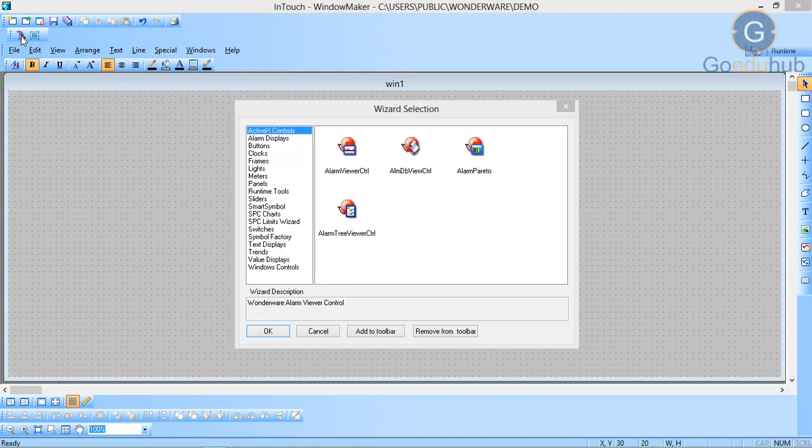Now we will create a vertical percentage fill link for an object. As you know, vertical percent fill links will be controlled by an analog tag. So first, for varying the analog tag value, we require a slider. For taking a slider, go to wizard, go for sliders and select vertical slider.

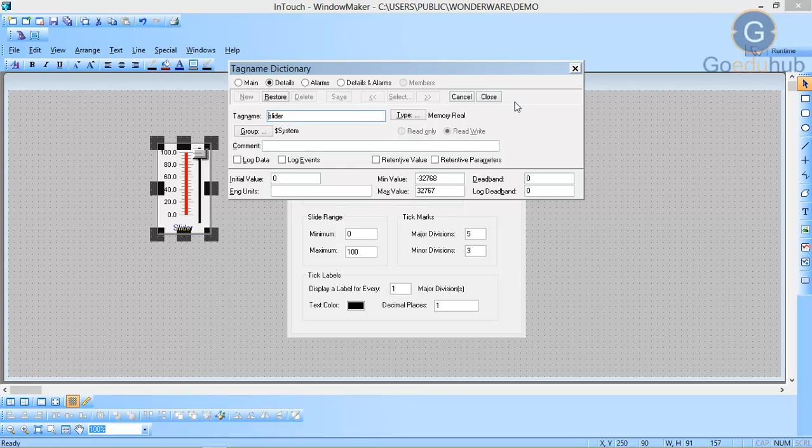Now provide an analog tag name such as slider, define that tag name, and notice that the data type will be memory real or memory integer. Then click on save, close. Now we will take an object and create a percentage fill link for that object.

So I am creating a shape by using a rectangle. Now I want that when I vary my slider between 0 to 100, my tank or that object you are using, the level of that object will also vary. For that, what you have to do is just double click on that particular object.

Now you can see here the percentage fill property. Here I am going to change level in the vertical direction, so I will go for vertical. Note down that point, the horizontal and vertical percent fill links are created the same way. Here I am going to describe the vertical percentage fill link.

Now in the percent fill section, click vertical, then the vertical fill analog value dialog box will appear. In the expression box, type an analog tag name or an expression that equates to an analog value. So here I am providing the slider tag name because I am using the same tag name with this slider.

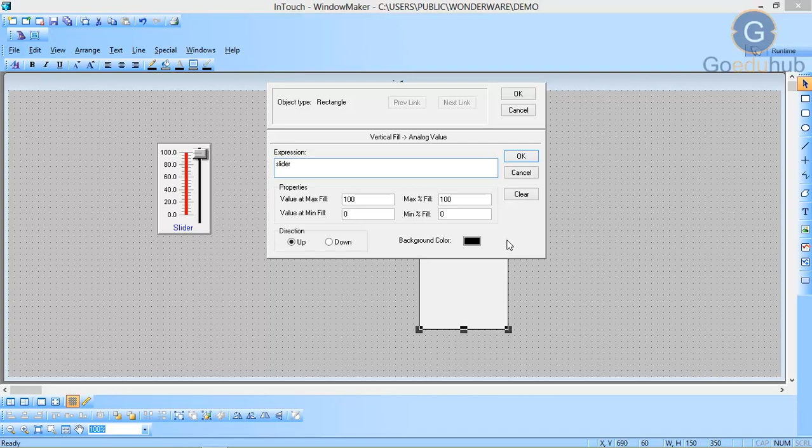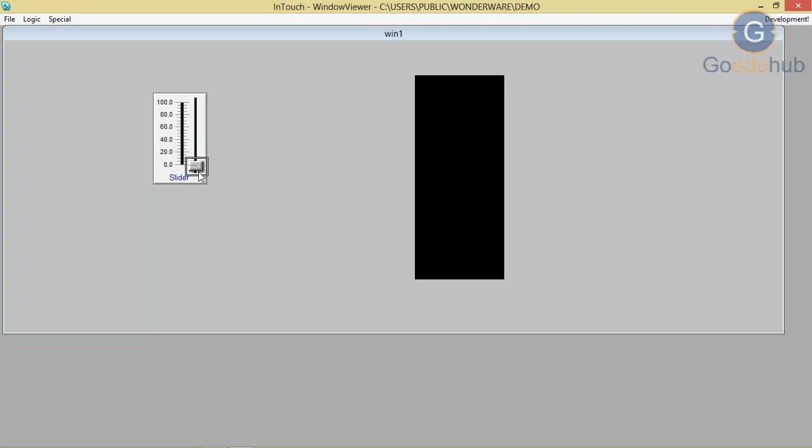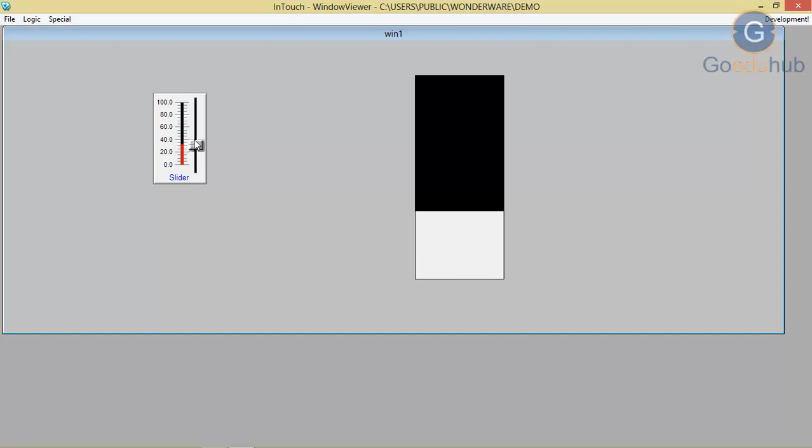Now go for runtime. As you can see, the foreground color is at 0% because my slider value is also 0. As I move my slider value, or as I increase my slider value, you can see the foreground color level also increases. As my slider reaches the middle point, and as my slider reaches the maximum point, you can see the level of the object is also 100%.

So likewise, you can use the horizontal filling property also.

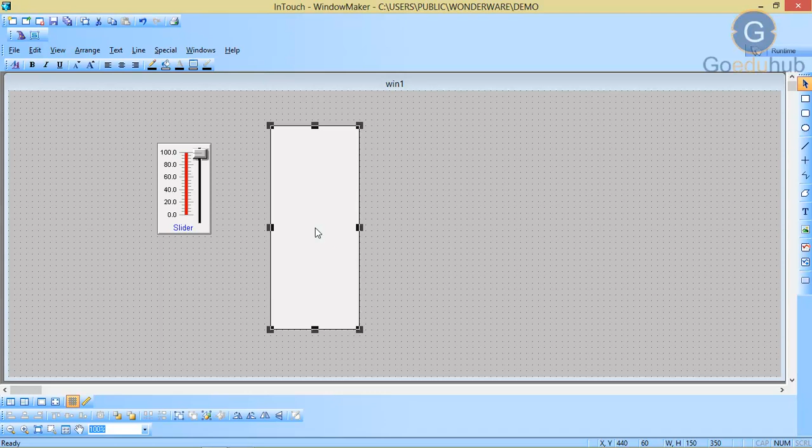Now, if we have to use animation property for a symbol from Symbol Factory, for that, go to Wizards, go to Symbol Factory, double click on that and single click. In Symbol Factory, if you go for tanks, you can use that for showing a tank.

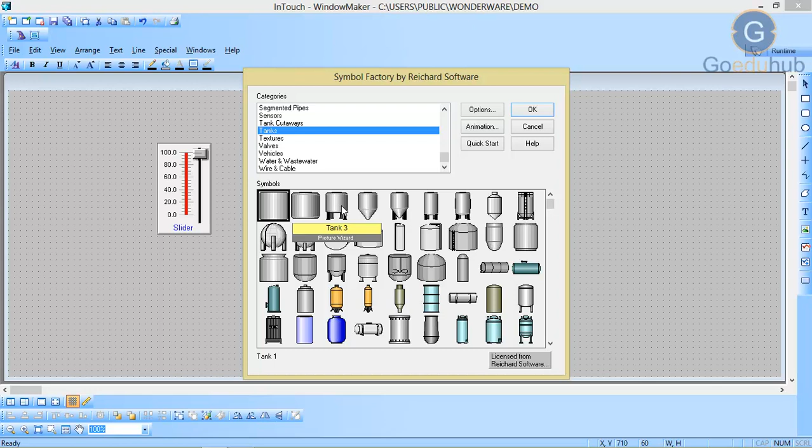Just double click on any symbol. From here you can enlarge it. Now if you again double click on that symbol, it will take you back to Symbol Factory.

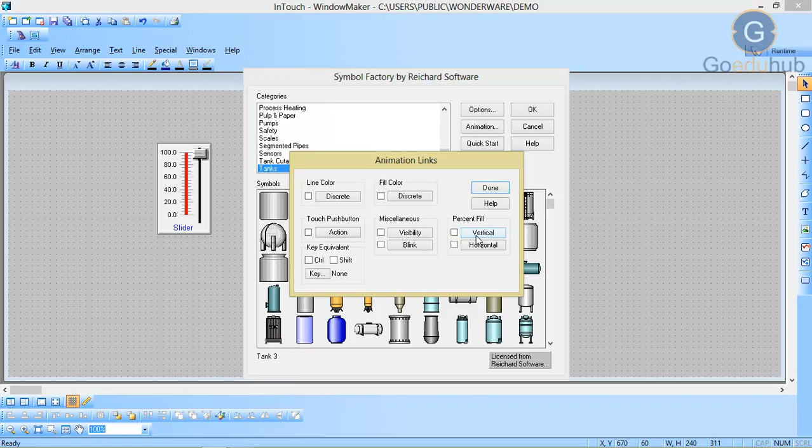Here you can go for animation, and here if you go for fill property, here if you go for percentage fill, go for vertical. And the same thing we have to do as we have done with the basic rectangle object. Just provide your tag name.

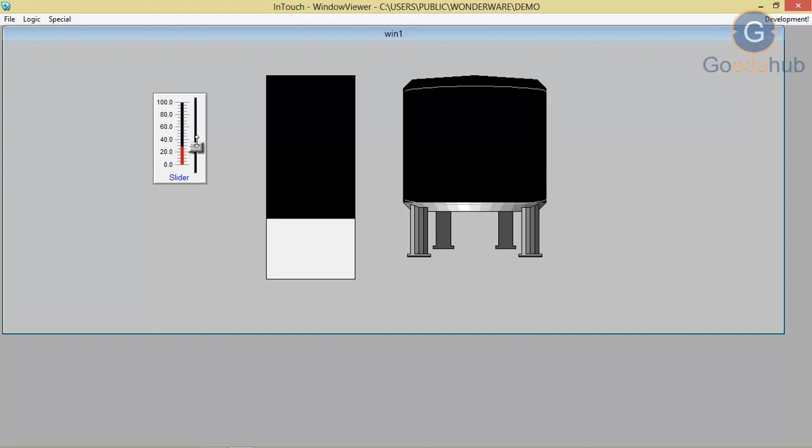If you see again here, when I am increasing my slider value from 0 to 100, the foreground color for the rectangle object and tank is also increasing. But as you can see, the foreground color for the tank is increasing from the pillars. Again you can see. So here you can see that the foreground color for tanks, meaning the change of level for tanks, is increasing from the pillars, from the base.

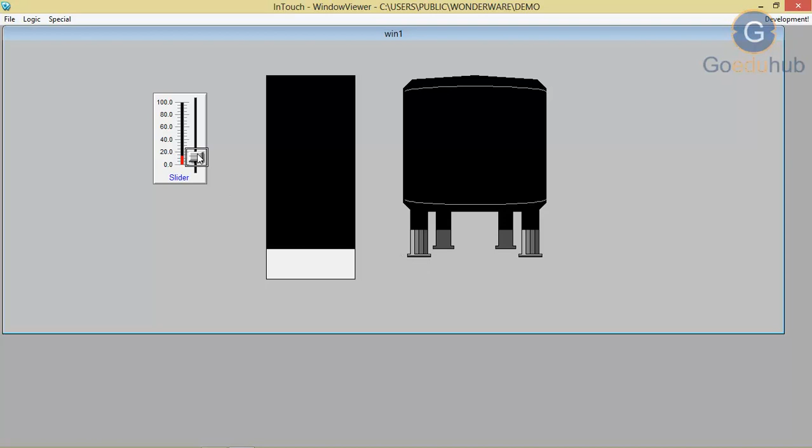So for removing this error, we can use break cell and break symbol. Now we will learn how to use break cell and break symbol. As we saw, the level of the tank is changing from the base or from the pillars.

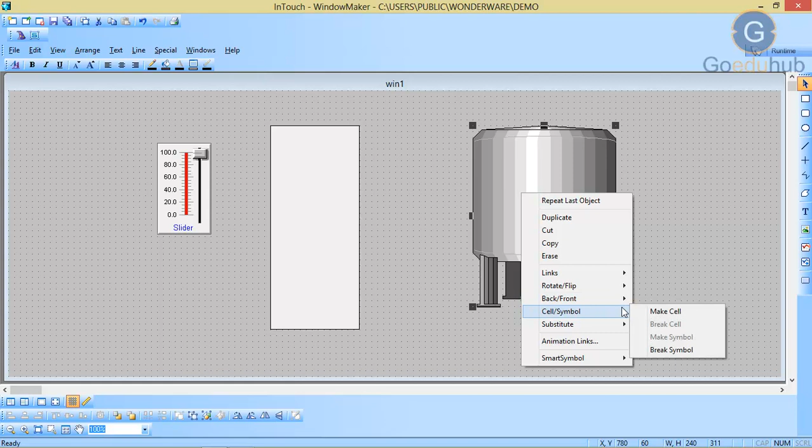So for removing this error, what we have to do is just right click, go to cell and symbol, and click on break cell. After that, again right click, go to cell symbol. Again you will see one new option for break symbol. Just click on that break symbol.

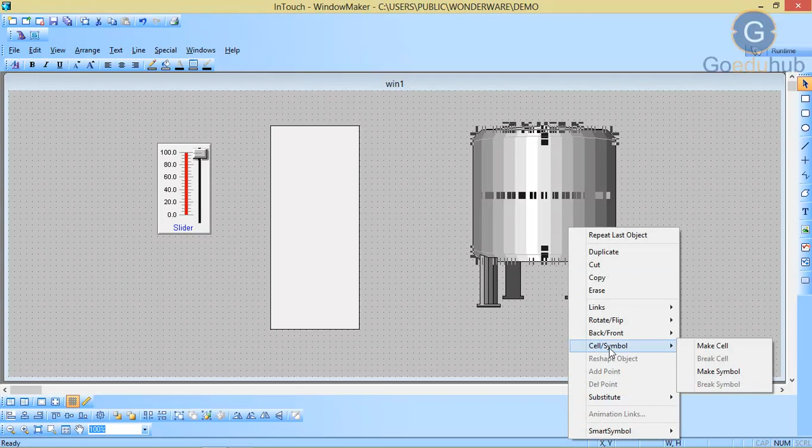Now you can see that every part of the tank is broken. So select that part for which you want to give the animation property. Then right click, go to cell symbol, and click on make symbol.

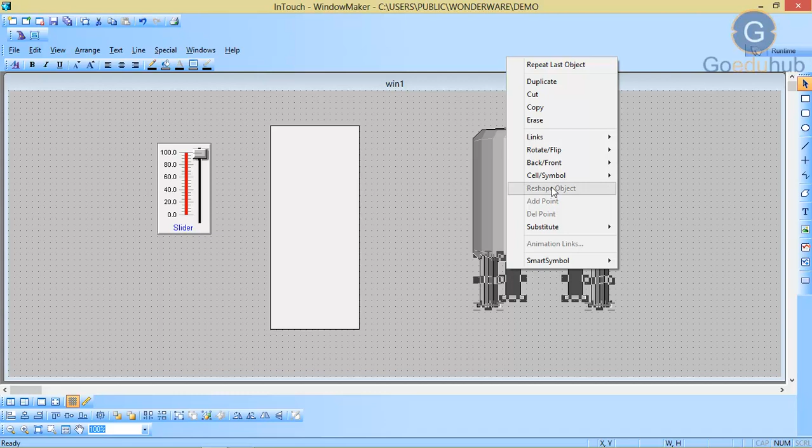Then it is asking if you want to give filling property to this portion, then click on yes. Then select that part which you want to remove. Again right click, go to cell symbol and make symbol. Again it will ask if you want to give filling property to that base. Click on no.

Now if you go for runtime, you can see that the tank is filling.

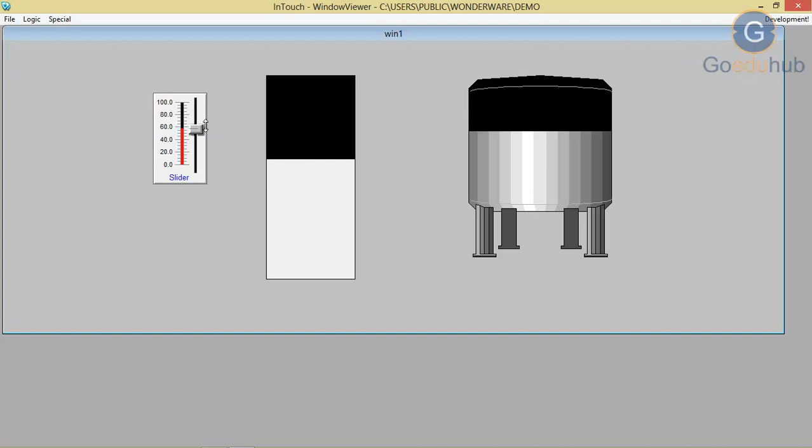So here one thing you can notice is that whatever symbol you are going to take from Symbol Factory, the first thing you have to do is break cell.

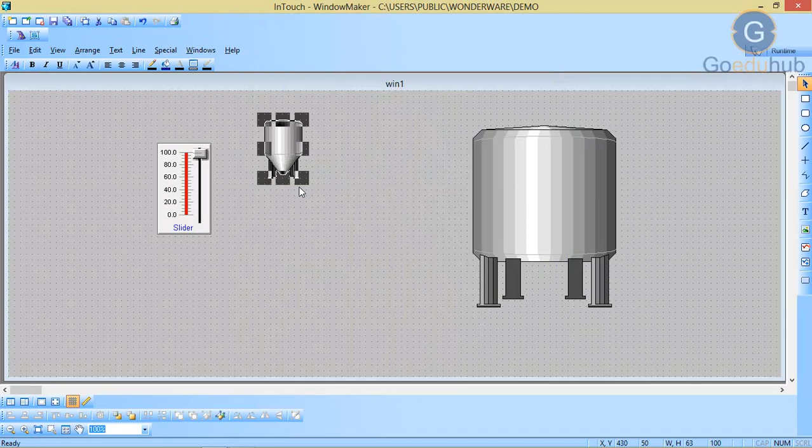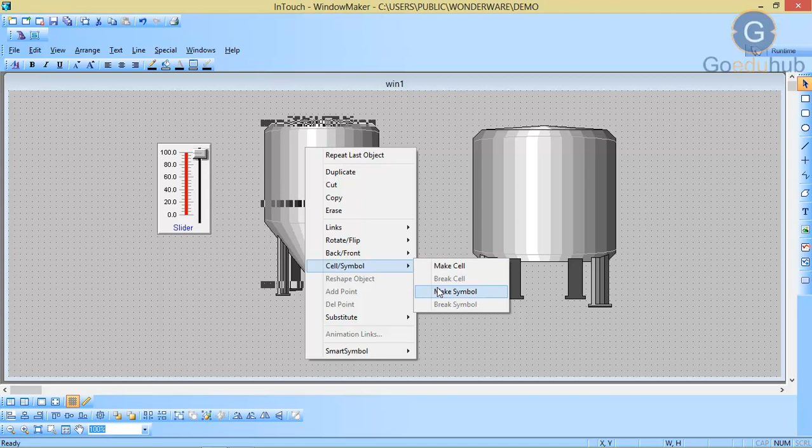After that, for removing that unwanted part, or for separating that part for which you don't want to give animations, click on break symbol. Now separate those parts. Right click, go to make symbol. Again right click, go to cell symbol, make symbol.

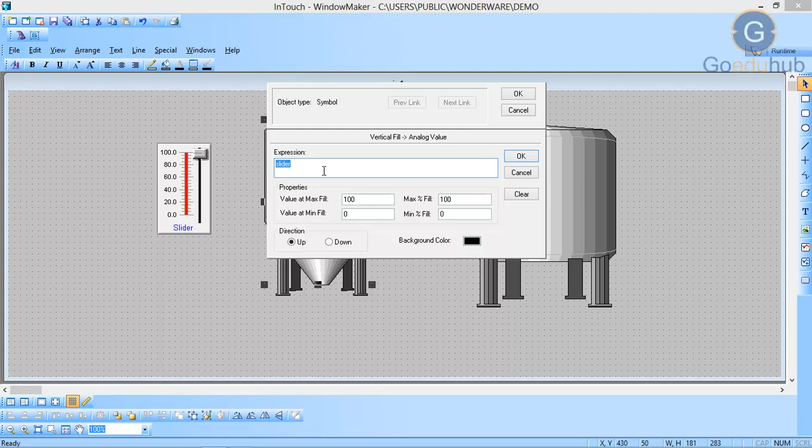So again, if you have to give filling property, double click, go to percentage fill, vertical, just click on OK. See.